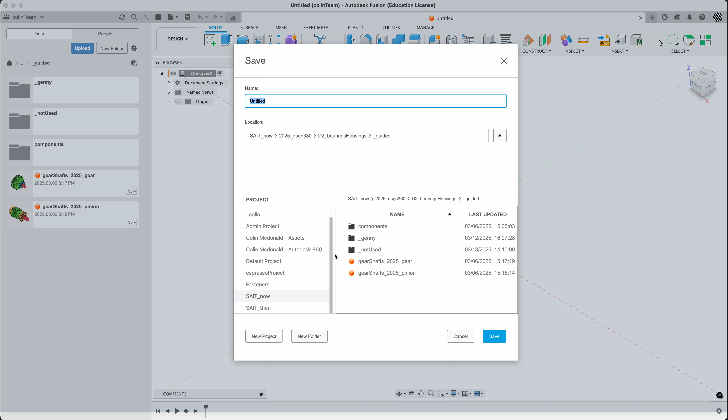Gonna pick up a name from somewhere else. So if I open up the location, I can see my tree, go into somewhere where I've got a name I would like to use. Let's do number 6. Nice. Go back to where I want to be and save.

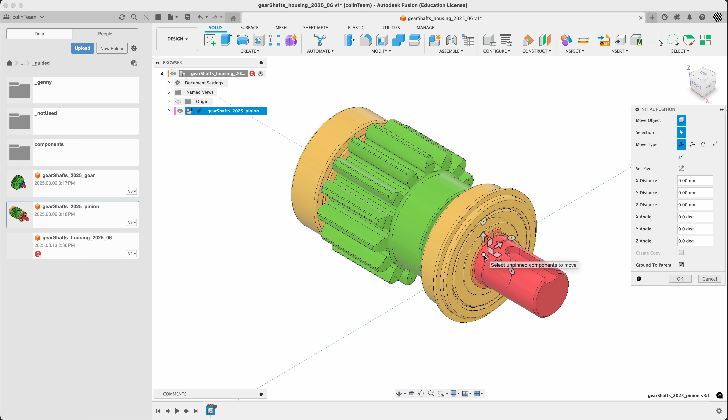Previously I've made some 2 gear shafts, pinion low gear and gear, big gear. Just insert these into the current design. And this is our first one that will just overlap the origin, so the origin of the component, the pinion, will sit at the origin of our part. Say okay, make sure it's grounded.

Sorry, I forgot to turn on the app here. Let me just start it up. The goal here is to build a housing around 2 shafts. So we'll put in our second here.

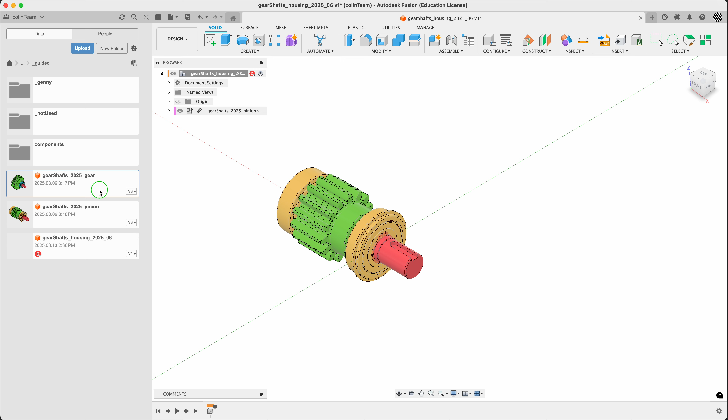I know that the distance, the pitch distance, or the rolling distance, or whatever you want to call it, is 90. So just pull on my, in our case here, up through the positive Y, type in 90, ground to parent, say okay. Everyone's good, except we can pull these.

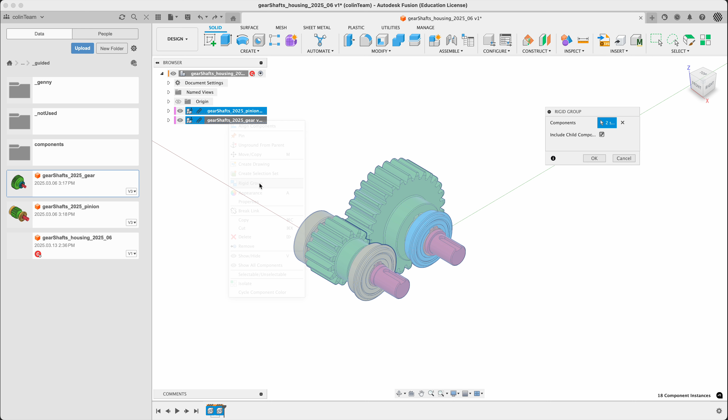So next and last step for these guys is to go ahead and rigid group them, include the child, and we can't pull it. This will save us from accidentally pulling something. Perfect, I'm going to save this just to make a point here. I'm going to call this shafts placed.

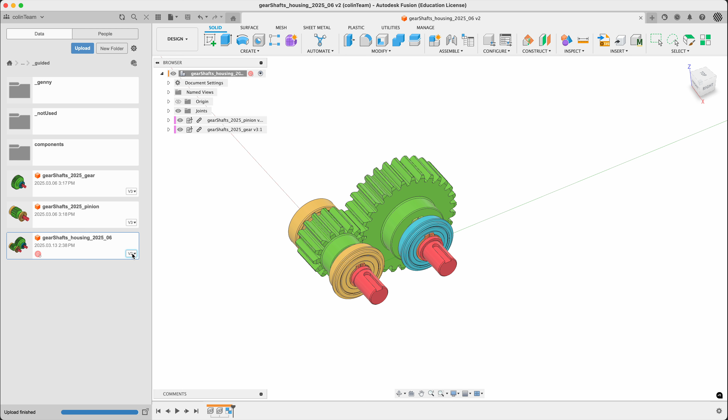This will trigger a version to be made and a good start point. See V2. Oh, there it is. There it is, shafts placed. We'll close this down for now, the data panel.

Now we want to make a housing around this. The housing has to hold the bearings, hold the shaft, holds the gears. So we've got an input shaft, usually an output shaft. This is not ultra realistic, they're very close, quite small. So we're going to deal with the tightness of this as well.

Don't get too focused on this being the only way to do this housing. There's lots of different ways. We're just going to be making a point here.

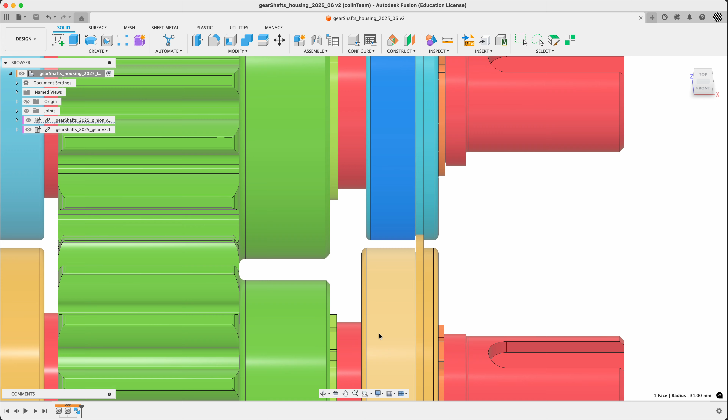If I line up on this top front corner, we can have a look at the bearings. They're the same size on the outside, 31.

However, we see the widths are slightly different. I've colored these components to my liking. I've made both of these bearings, which are from SKF, the same color based on width, and they have a different bore as well, so these are all modeled correctly by SKF. If we shift to wireframe, we can see the gears are from KHK, are all metric, so everything's looking okay.

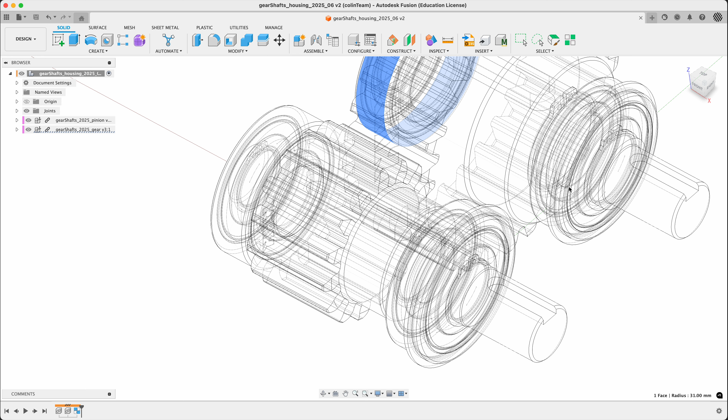The goal for you guys here is to put a housing around this that makes sense, a rational housing. Excuse me. Let's have a look at the right thing. Let's have a look at our guide here.

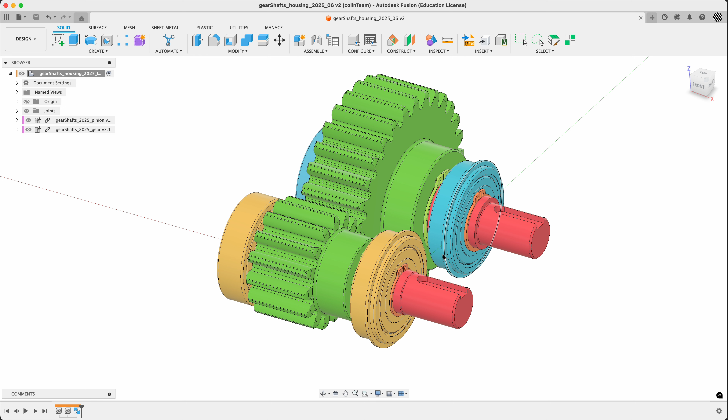My goal is going to be to keep the housing as bodies inside the larger component and only make the components right at the end. So that's the plan.

the housing based on the components, kind of similar to how we were doing shafts. Just going to move this here. So let's get started. First, we're going to need an inspection probably, section analysis, just so we can see through the parts.

See the balls modeled in the bearings. The shafts are solid. There's a key hidden up in the assembly further. So that's fine, turn that off and on.

Let's have at making a sketch. First thing I'm going to do is try and place something in a sketch so we can control the size of the housing. So let's begin with a sketch on, say, the XY plane.

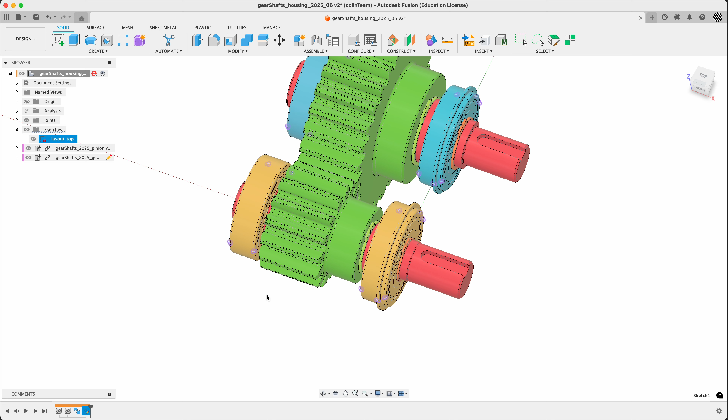Sorry, moving stuff in my office here. Okay, so... losing my voice. Getting sick, COVID. Okay, so let's see here.

I'm going to use these guides to build our extrusion. I'm going to create a new sketch.

So I'm going to be after my ZY, YZ. Say okay. Hold on here, am I on the right thing? Just redefining, just in case I got the wrong one, ZY. YZ.

And go ahead here and start getting stuff sorted out. I want to begin with the kind of general shape here. So, oh, that's not right. Start up the sketch.

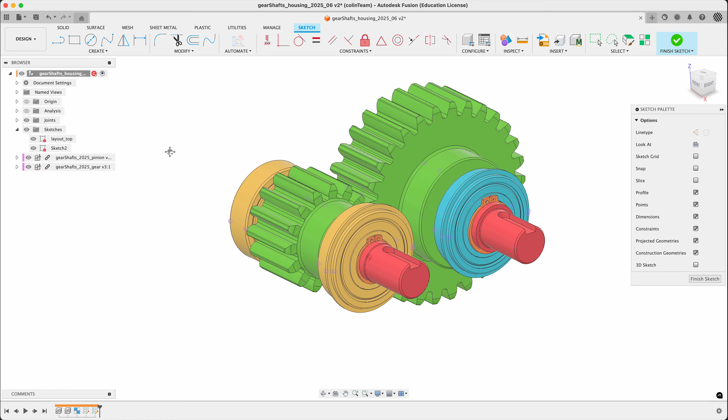So we want to attach the floor. My plan is generally a fairly boring shape, kind of like a rounded rectangle.

Notice I'm all over the place here. I'm going to do things on purpose, so horizontal, vertical, and tangencies.

The question is, where do we want to place things? Let's have a look here. We have the housing extending quite a bit above the gear and quite a bit below the larger gear, that is, not the pinion. So we're going to try and stick to that.

So let's just pull that into kind of a shape. And let's make sure everything's fairly kosher.

We're going to have a high cap, so maybe I want to see if we can grab that. Going to try and keep these fairly small.

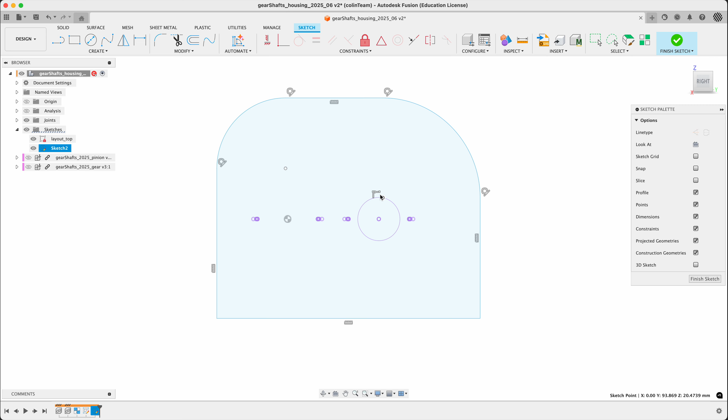It's fighting me. Hold on. Pull this up. Oh, that's why it's fighting. It's stuck, so I accidentally pulled it onto something.

Auto-projected there. If you want, you can just delete that. I'll have to watch out for that. So there's our shape.

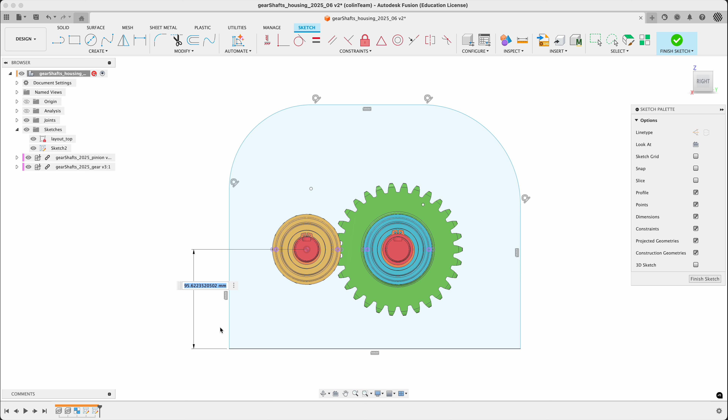Now let's start dimensioning. Where do we want the dimension from? The origin, probably. 95, let's go for 90.

Now, I do have to be a little careful here. I want this to be symmetrical. So I'm going to try and fit this in. I would like this line to be symmetrical.

Easy way to do that is to project something that gives me the other center mark. So let's try projecting something. Don't want to get the end because it's not going to give me a full circle. How about this piece of the shaft?

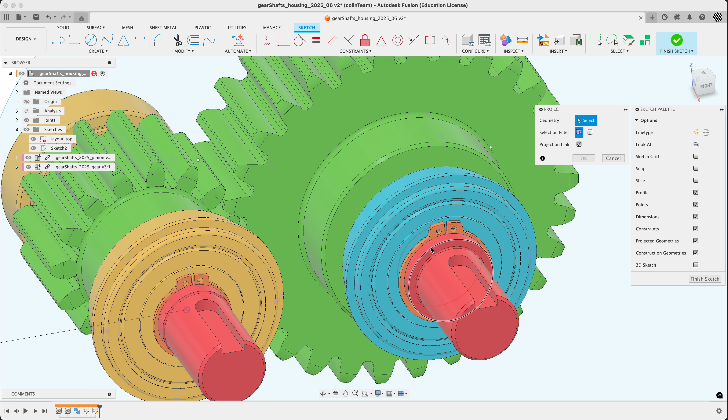Doesn't really matter which one I use. So let's go for this edge here. And it might not be such a bad idea to do the same for the other one. There we go. So that can stand in for our two parts. Gives us two origins.

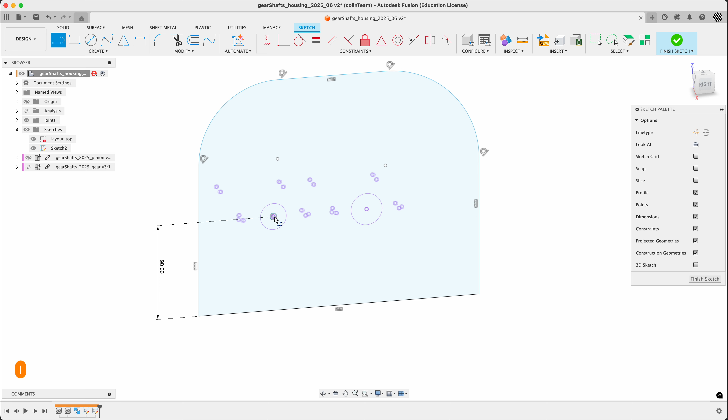Easy way to do that, well, there's various ways to do this. We can actually just draw a line to the middle from both. Make them equal. Maybe even make them construction so they don't get in the way.

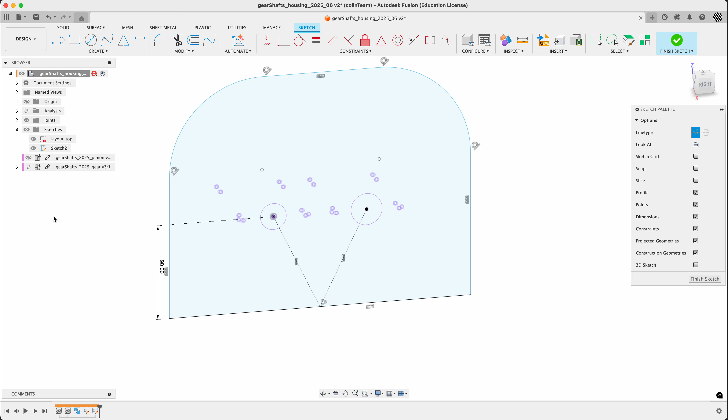And that gives us a nice way of controlling our spot. Let's have another look. Not too worried about the small one, it's the big one. So let's keep that one on.

Because we have symmetry on, we can dimension from the origin to whichever one we want. Let's go with 70. And then up, I've got 90 here. Would make sense to almost do the same.

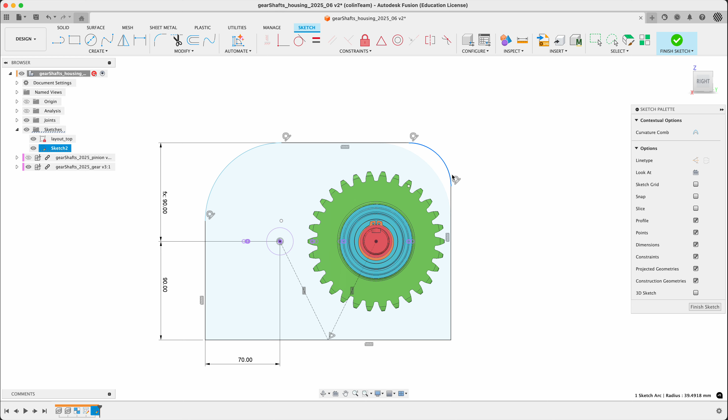And then all that's left is to figure out how big this fillet is. So let's keep the symmetry going. And because my dimensions are largely on the left, let's stick with that. Let's say 40 for now.

We're going to end up with a split. I'm going to map that in already. Let's just attach it directly across. Right now it's construction, that's fine.

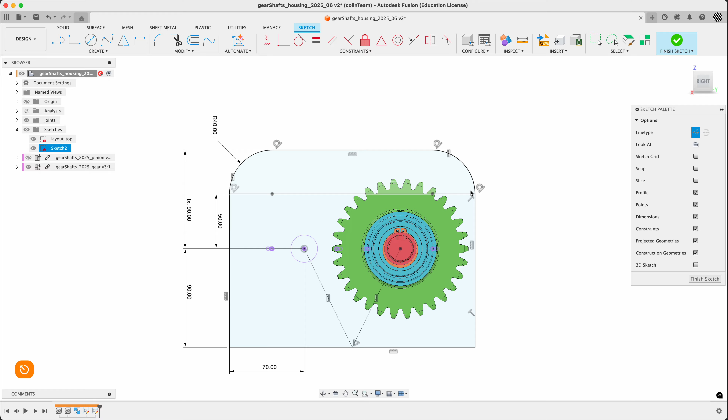Notice even though if I go beyond the fillet, that's fine, it does stay correct. So to me I don't see any problem with the top of the bearing, or the gear, sticking out a little bit. Let's get it about right. Say 50. Now we have a little bit of danger here because that edge is right on the start of the fillet. It may not be a big deal, but let's decrease it a little bit.

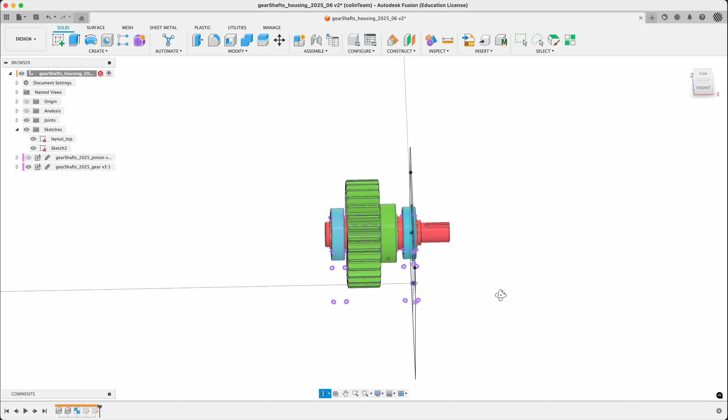So that's my plan for the shape of the housing. Where do we go from here? We're going to do an extrusion here, so this might be the inside of my housing, the void. Let's figure out where we're going to go from here.

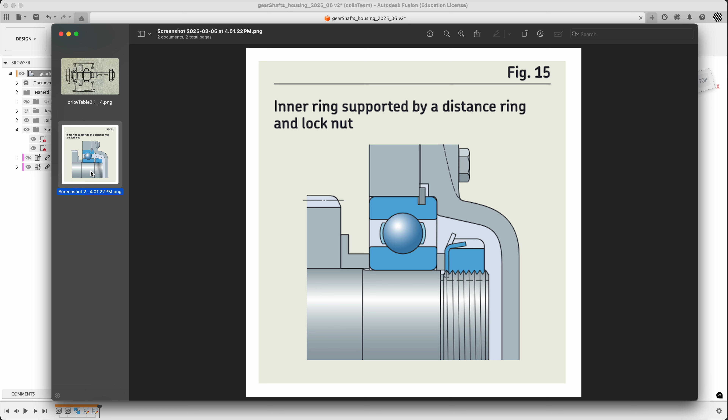So look at SKF, we have the housing lined up on the bearing inside face. Fine, let's do that.

Now let's do a prototype and then we'll come back and tidy it up a bit here. So extrude first - this thing's going to get in the way, so hold up before we do that. Can't do that yet, edit sketch.

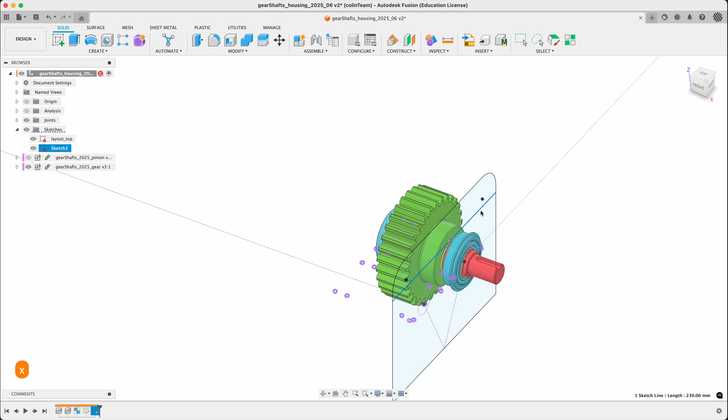Going to turn it back to construction, that part line. Just get the whole thing at once, easier. While we're at it, sorry, I was going to do this later.

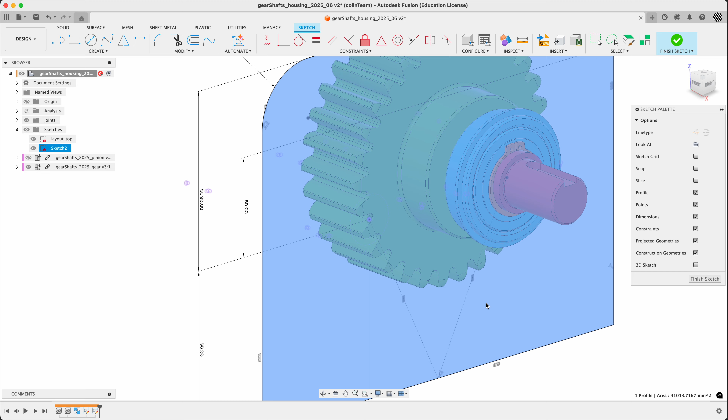Notice that we've got a hole here, so in the region let's edit that sketch again. This one is also construction. There we go. But we already know the size of the bearings are all the same, so let's project our actual bearing size on here as well while we're at it.

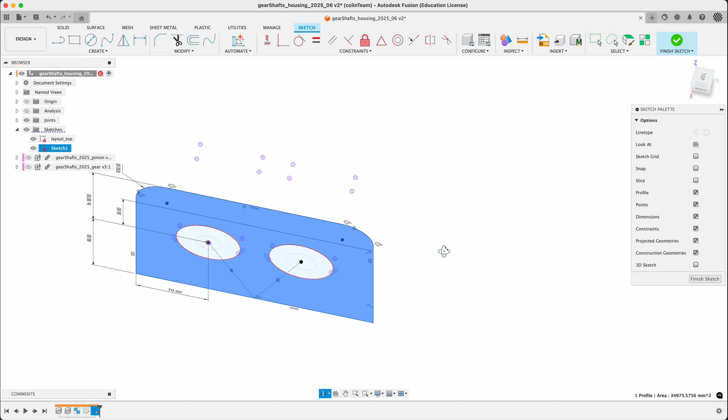Let's project again, I'm going to pick this whole face on both. What does that give us? Right, there's our bearing. So we have a region which we can extrude and we won't interfere with the bearings, which is good. So, extrude this way.

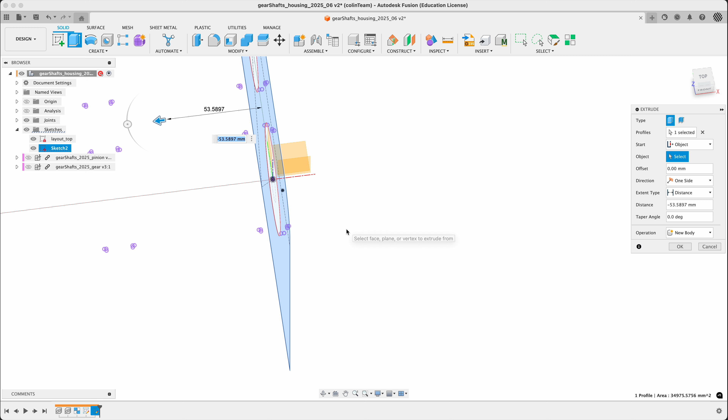Now we want to go from the bearings, so we're not going to start from the profile plane, we're going to start from an object. It's a little hard to see here. If I press Command or Control, you get it to turn off the preview.

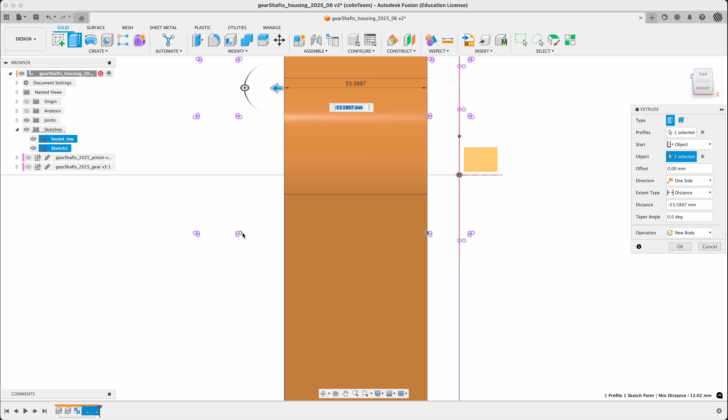So I want to start from the inside of the bearing. So I know where I am, let's go to home. I'm going to pick that guy first - that looks fine. And I'm going to go to the opposite side, which is over here. So not a distance, but to an object again. This should have the bearings sticking out completely.

Let's turn everything on again. It's kind of good. Now I'm going to make a wall thickness here, so let's go with 5 and then try a shell after I drink some more tea.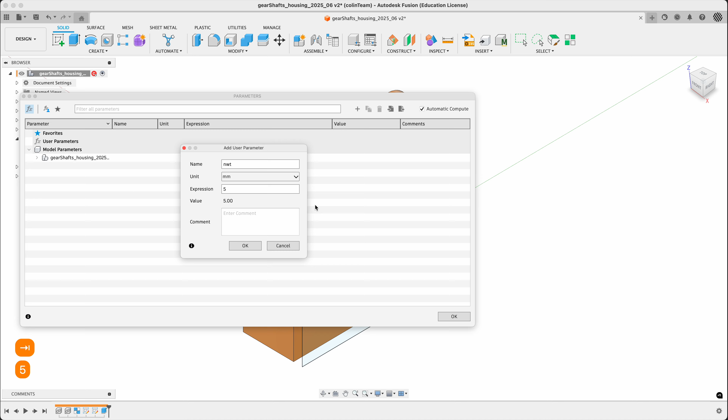So first shell - no, let's do the nominal wall thickness. Let's do a user param, nominal wall thickness standard, let's make it 5. Shell.

Shell, shell. Pick the whole body, it's easy to pick in the tree or in the browser. And let's go outside, NWT. It's acting correctly, you can see it eating a bit of the bearings - that's okay.

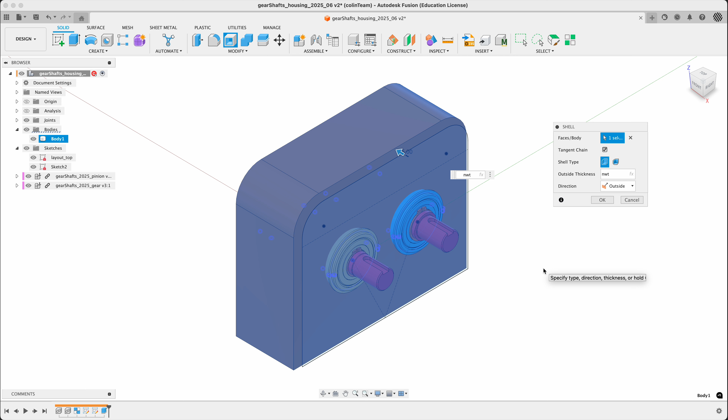Turn on our analysis. Now ideally the housing goes right through - we can see we have a small area here. Ideally the shell goes right through the ball in the bearing. We can see we're not far enough here.

So two things to move - we have to fix the extrusion a little bit and fix this extra piece. So let's actually do it in reverse, fix the shell first. It's asking for bodies, but what it does is if you just pick the body, it just hollows it.

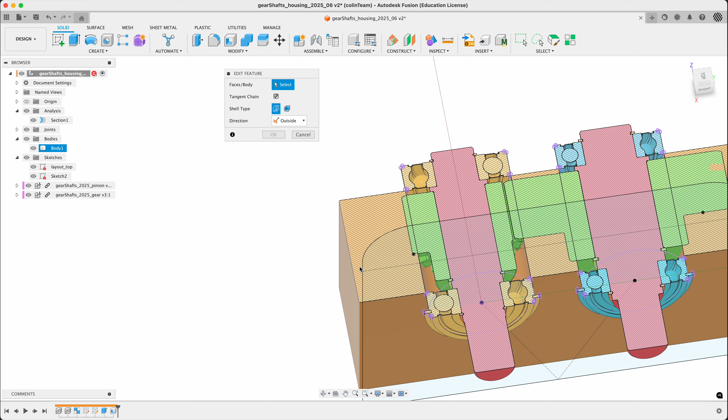Another way to do the shell is to actually pick the faces you want to remove, that's these guys. Just pressing Command to remove the preview. That looks good.

Let's check how we're doing, two steps at a time. It's better. Next, we're too far inboard, I would argue, so we should try and put the housing through the balls, or a little bit more. Let's move out one more nominal wall thickness here.

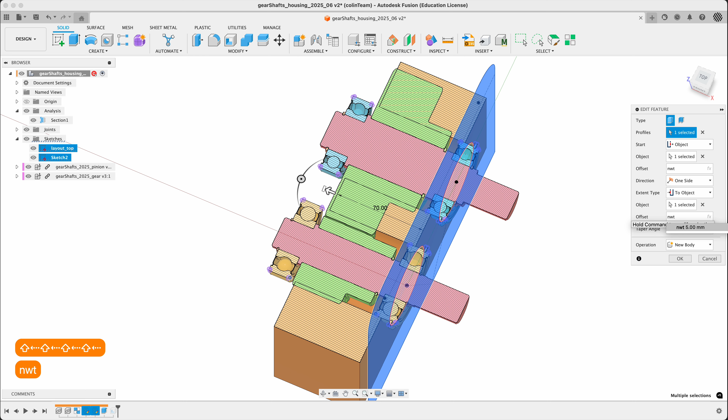So back into extrude. Notice when we've got offsets, when we have objects, we have offsets. Let's try NWT and see which way it goes. Oh perfect. Let's try the same on the other side. No, that's the wrong way, so negative. There we go, try saying okay. Look at that, nice - so our housing is looking good there.

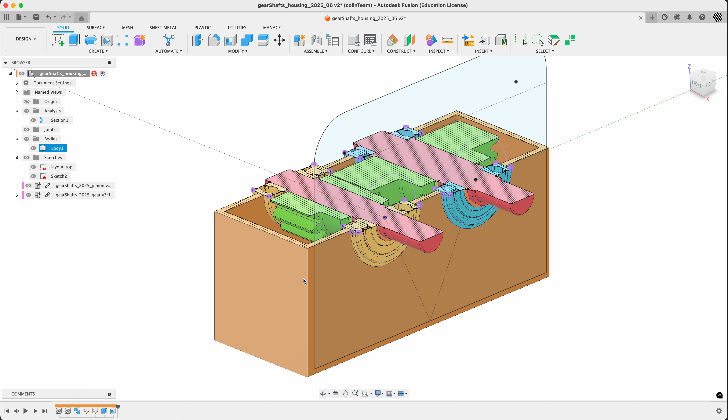Or at least the walls are, and we've got a good gap over here. I would like to tidy this up a bit though. Right, these corners are going to be hard when we cast this - the contraction or the freezing of the material is going to put a lot of residual stresses into that corner. Maybe we can fix this up.

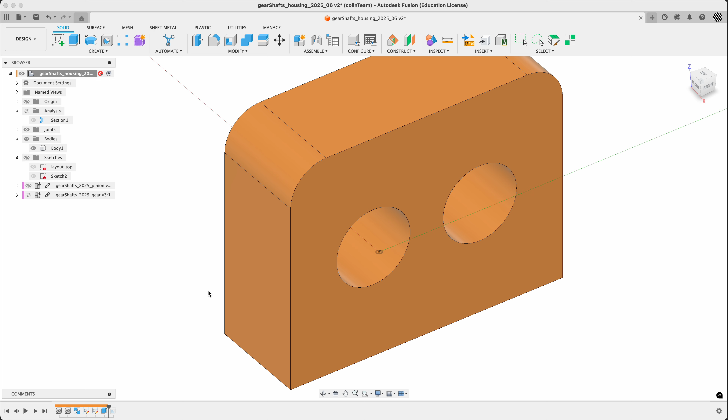The easy way is actually to do it before the shell. So let's hide our stuff and turn off our analysis and tidy this up a bit. It might be easy to actually just use a chamfer - right click on an edge that will take a chamfer, make sure tangent chain's turned on, and maybe try 10, 15.

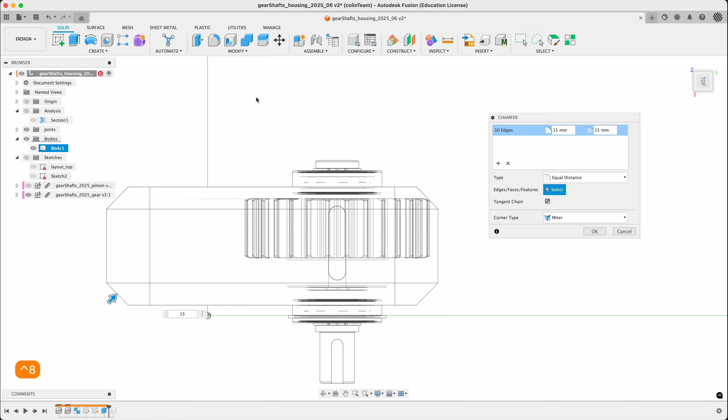Checking. This is the inside, that's a bit close. Looks good. Better known as NWT times 3. How about 2.5? Getting a little close, it's not bad, but to be safe, let's go with 2.

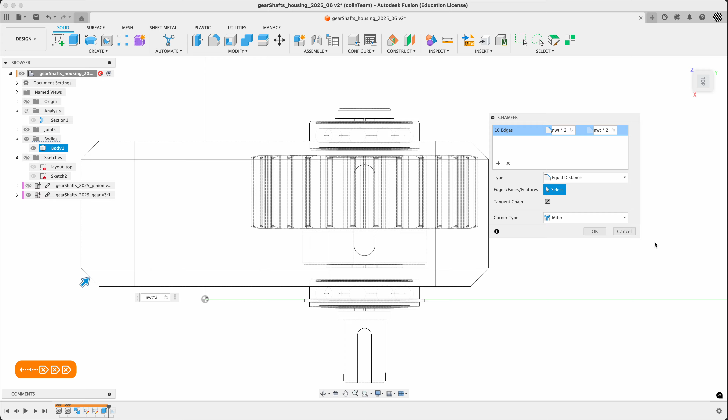Back to normal view, and we can see our shells yet to happen, so shell. See both parts and have a look at the analysis. No problems over here. This looks fine. Let's just do a little check here. Anything we can grab out here to there, about 4 millimeters, that's fine for us in this size.

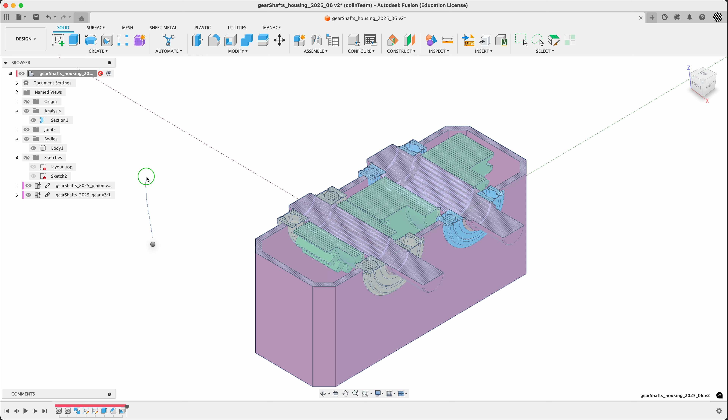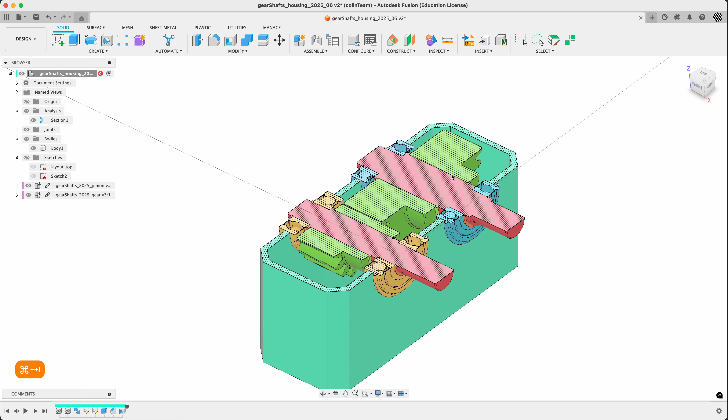So that's our part. Next, let's look at our sample. We need some material to hold the bearing, obviously, and right up to the ring on this guy. So let's keep an eye on our ring. Also a little chamfer here. Okay, so that means our chamfer is going to be on this side, on this orientation. So

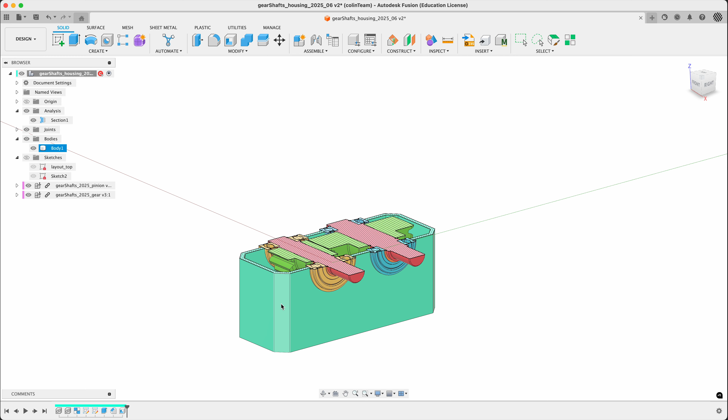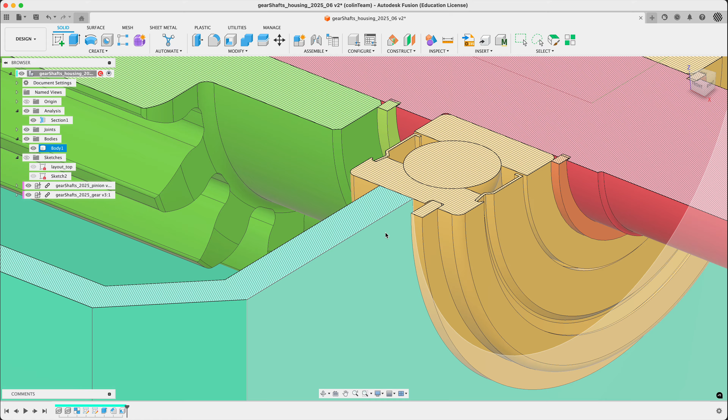let's add something. Now, for the purists out there, and I know that's okay, we're just doing an intro here. What type of shape should this be? Most of the time you just put a ring around here. So we're going to be filling this spot up to the inside of this, and then from here down to about there. So the temptation is to kind of do loops and follow the shape of the shaft. I'm going to do something else. If you feel this is violently opposed to your philosophy of life, sorry, too bad.

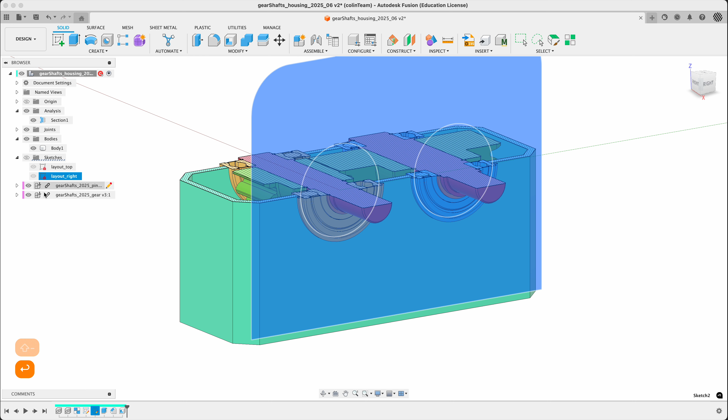So we're gonna have a sketch here. This is our layout. Right. Underscore. Then we're gonna edit that guy. So I'm gonna hide these two because they get in the way. Just layout right. We already have quite a lot of information here, so let's just continue. We've got enough here probably to get going without that one.

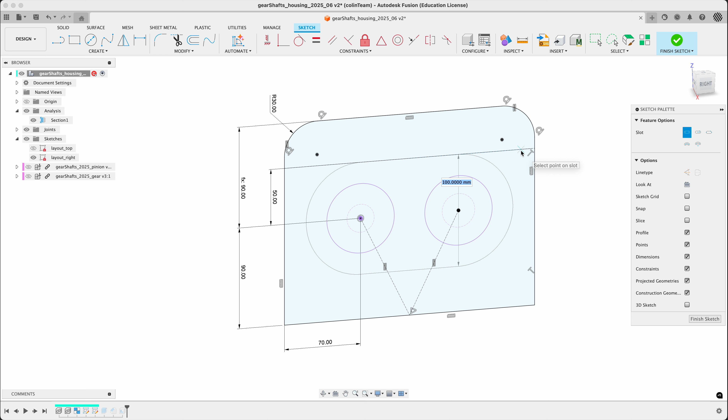So I'm going to do a slot shape. So S slot. Center to center because we have two centers. Don't go above the cut. So 100 is going to be our max. Let's see. Turn on something to give us some ideas.

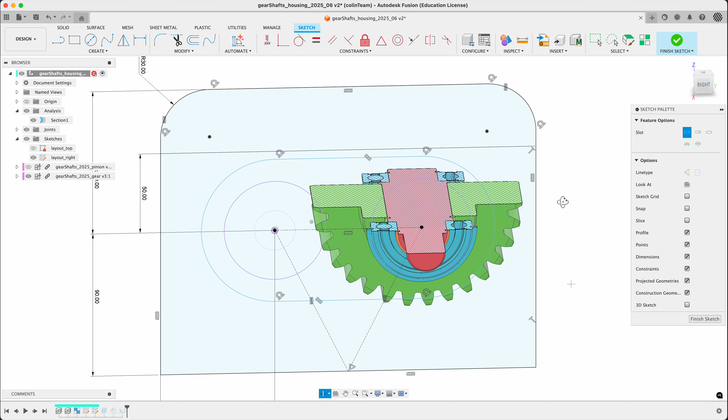So we just need some material here to take some fasteners eventually. We're not going to model it in this effort because I've done it before. It takes too long. So let's just use a dimension here. Let's say 12. This gives us some room here. So maybe we need to move this guy up a couple of millimeters. Still got some room on the top. So maybe that's a good plan.

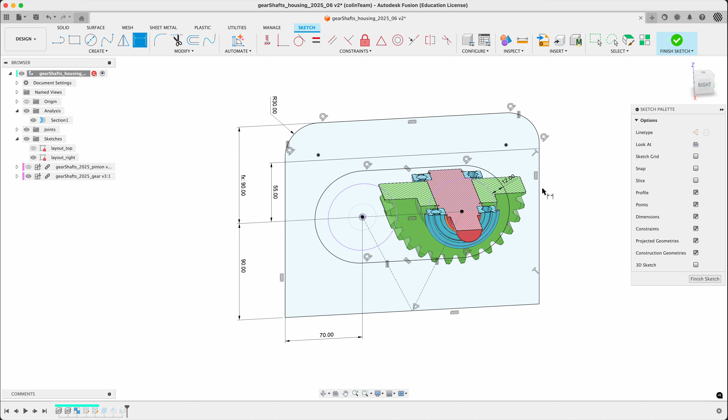One of the dilemmas is when you're doing castings, you want to pull the core out of the inside of the thing. So you want the inside core to be pull-outable, if that makes sense. So it's not bad form to allow some way of making sure that we can get this out. We're not going to do drafts either because otherwise this video gets crazy long. So let's just do a little prototype. Let's see if we can use this on both sides. So let's have a go.

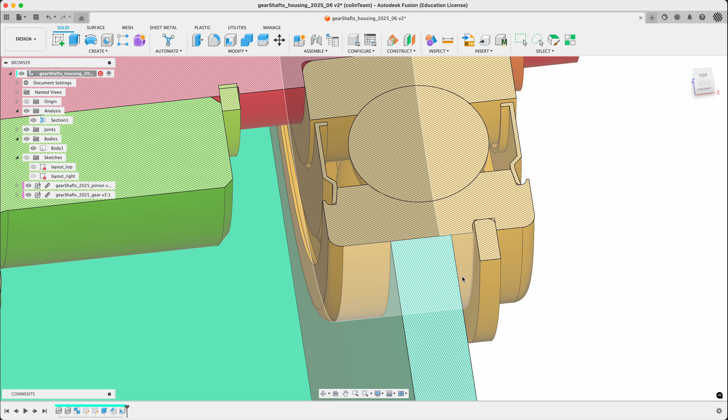Now, before we get started, one of the things that we have to be a little careful of, just hide all these sketches for a moment. I have modeled these so that the two rings on the shafts are lined up and they're on their origin here. You can see that. The problem is, sorry, wrong ring. Problem is that this is not a rational distance because of the way that it's modeled, and it's just in a slot. If we measure this,

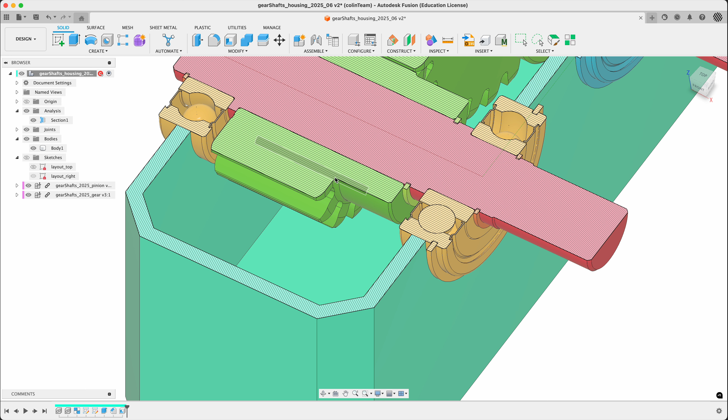2.02, that's perfectly fine for the bearing. That's how it comes. But for us, we'd like a rational number. 2 millimeters is quite good. If the shaft gets mounted and assembled 0.02 millimeters further in on both sides, that won't have any real effect on the parts or the functionality of this thing. So we're going to do a rational approach here. Rather than just going straight from the ring, we'll actually come away from the wall of the

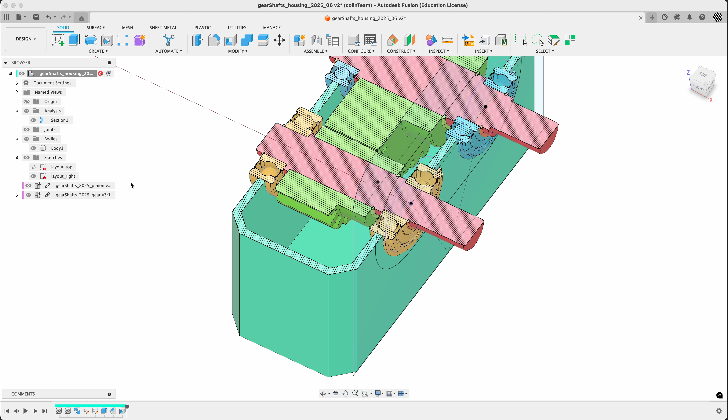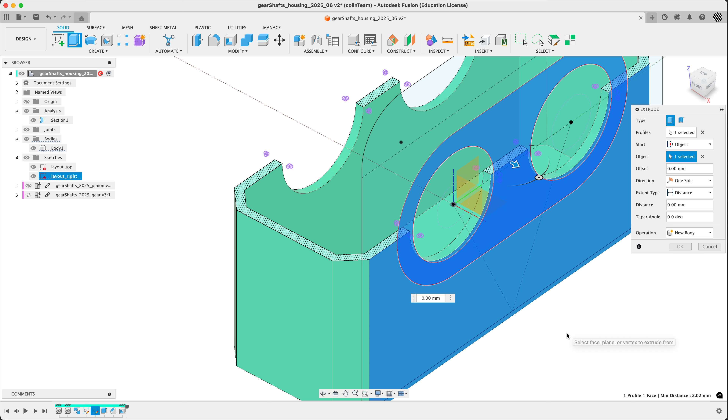housing. So let's turn our sketches on. Sorry, and continue on. There's our shape. Now we can get rid of all this stuff and just turn on our other sketch. If we hover, we can get a little quick ghost of what's going on. So first, extrude that guy. I want to go from an object, the plane of the housing, and go up. Well, it was 2.02, so why not just go 2?

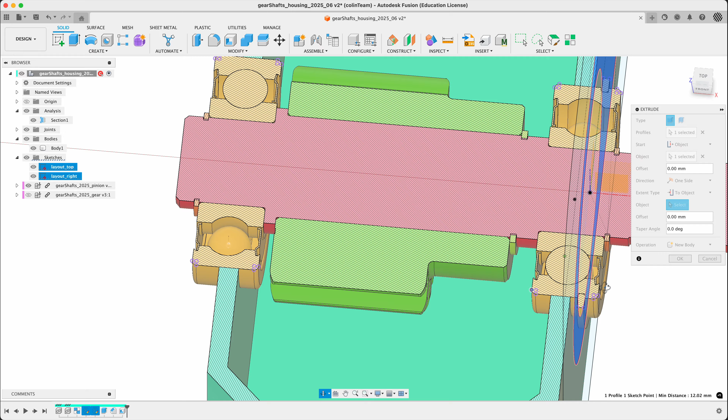But we're missing the inside. So let's rethink this. Keep it 2 for a moment. So let's instead say this is our object. And we want to go to another object. This time the wall itself again. It thinks you want to cut, no, join. And then we want to offset by 2. This should give us a small tiny gap here, which will be taken up in the assembly itself naturally.

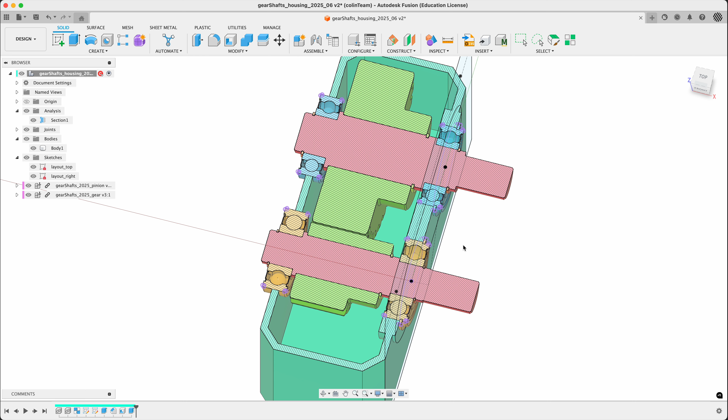And we get it all, that's not bad. So that's good, let's go with that. So it's looking okay, let's check the other. It's a little bit short, but that's okay, because this is mounted on first, and then the rest of the shaft assembly is pushed in through here, so that's fine. No problem there. Now, maybe we can just do the same on the other side.

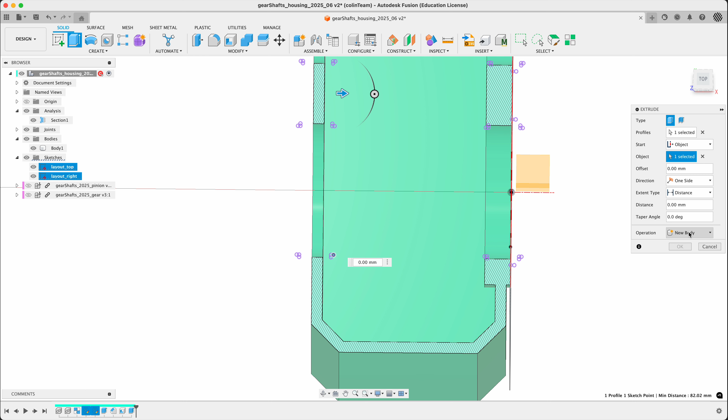Let's do another extrude. Use that sketch. This time we're going to go from one object just straight through to the next. So I'm going to use the closest ones again. So not from the profile plane, but from an object. Do another object. Not a cut, but a join. See how those go. It's good there, because that's what we picked. And it's good there, because it's not bad. It's fine.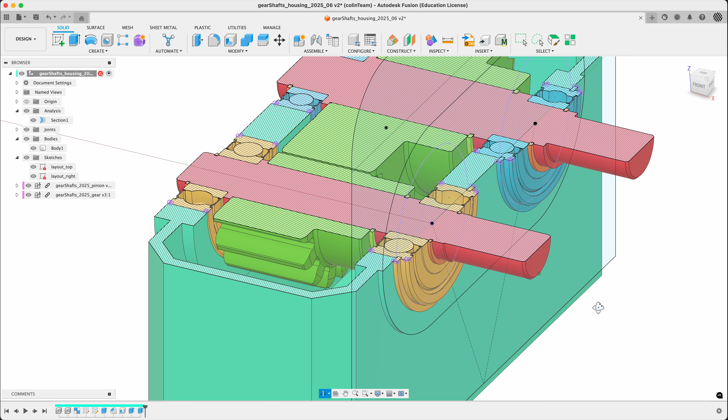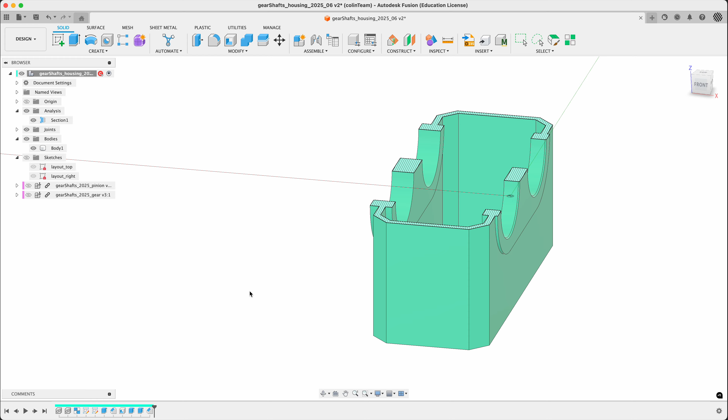And we needed that chamfer. Let's do that while we're thinking about it. So we had a chamfer here. Right click on it, put a chamfer in, one, say, just turn off the preview. Pick the other one. We're gonna end up with an accumulation of smaller secondary tertiaries out here, that's okay. The other one in our guide doesn't have any chamfers.

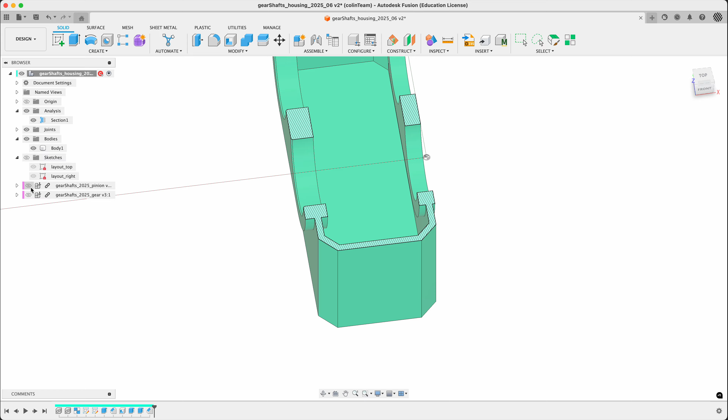Oh, idiot, wrong one. Hold on, let's fix that. If you're doing this, maybe pick the other ones first. I'm on the wrong side. And then unselect these guys. Then you don't lose your row. Sorry about that. On the correct side. There we go. Because this is the assembling direction. It comes in from this side. Looks okay.

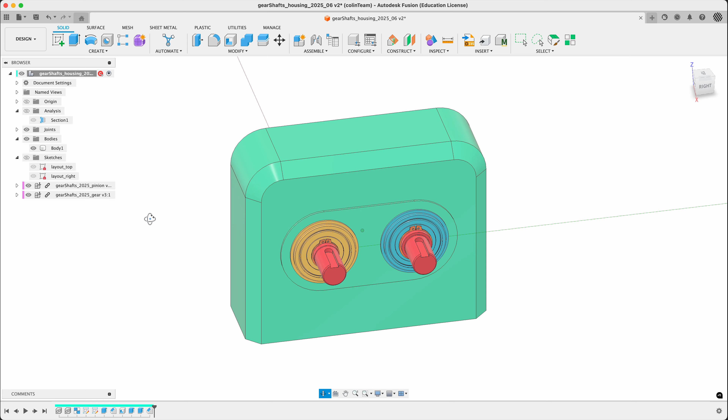So I'll turn off our analysis to see what's going on. Let's do a practice split. So sketch is back on. Split. Let's see if we can split it with that construction line. No. So we do need to go in here. Edit sketch. Construction X to toggle off. See if we can split this time. Split body. This guy. Tool is outline. It extends, cuts it off.

Notice we have our curve starting above the split. That's good. Safer. And our gear sticking out a little bit. That's okay. Looks very exciting. How about that? And there we go. That's our beginning. Oh, no, before we continue. We do have a problem with pulling this out. There is an undercut here. Let's do another inspection on the other side.

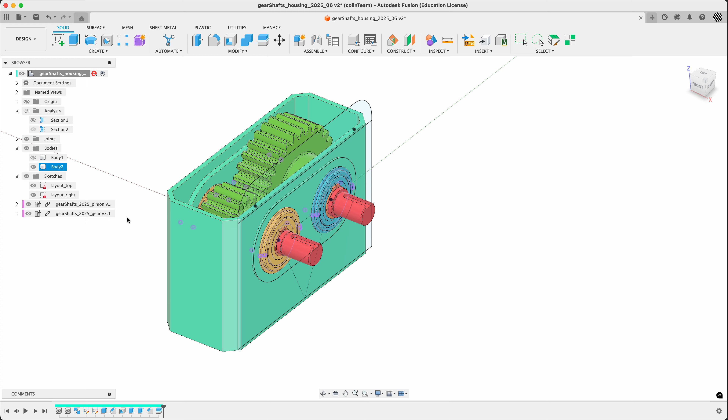Just switch. The underside of this is not pull-outable, right? The core will get stuck on that. There's other problems here. The fillets will not go on and all that sort of stuff. We'll fix that maybe later. But for now, we can't deal with this. So let's modify our sketch one more time and add something that we can use to deal with this.

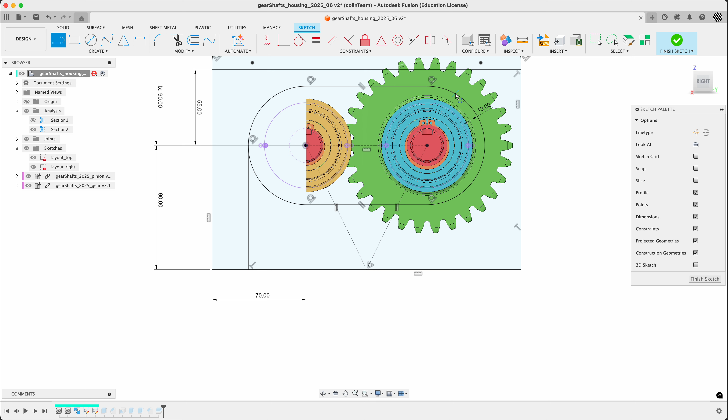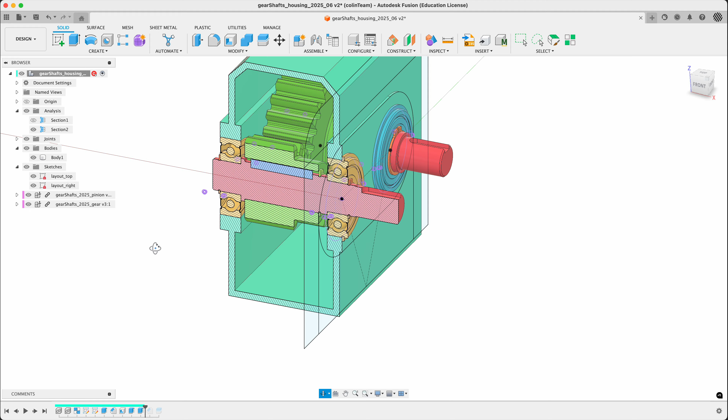The easiest way to get a tangent line is click somewhere on the line, drag, you'll see it pull around, snap to vertical, snap to the bottom line, same on the other side. This gives us a new region. Doesn't screw up anything we've done already, but now we can do another couple of extrudes, and I'm going to do that before other stuff happens. So just keep the body showing. Sometimes it turns off, and then we can use the analysis if we want to just turn it on. Don't care about the shafts.

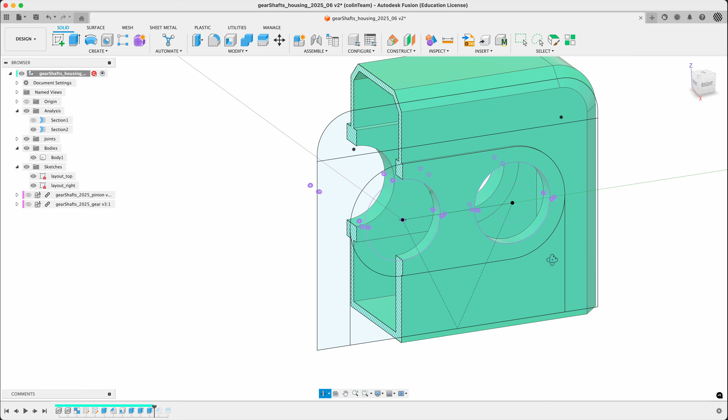So extrude just this piece this time, not from a profile plane but from an object, this guy, and to another object, the inside wall. Join. This is good for us because if it does move, then it just moves with it. So object to object is always a nice way to do this. Again, extrude from an object, say this, to another object, the inside edge. We end up with a locally thicker wall. It might cause problems, but it's hopefully outweighed by having no undercut. We run all the way to the end of our part.

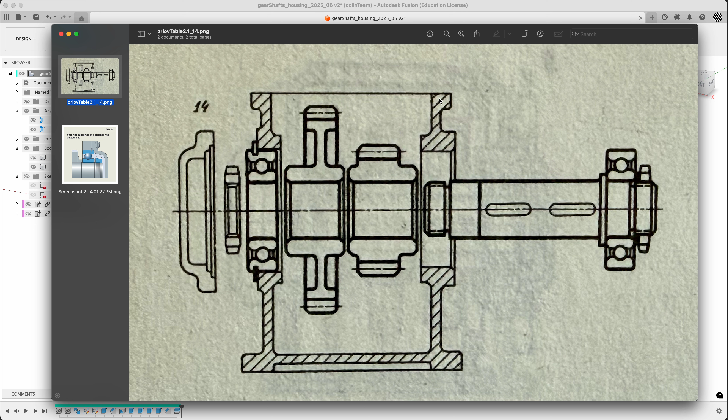There we go. We can see our top housing is looking good, so we can turn the top body on and off. Now, you might have noticed we're missing this, so we might be doing a little bit of fiddling here. So we've got lots of flange on the top, and we're going to put a foot on the bottom. But for now, I would say we're going to stop there. That's our end point of the video for now. And we'll just turn off our analysis. So that's where we're at.

Next, a little bit of detailing. Make some caps for holding stuff in the top. Put some rims around as per our sample. And then maybe a last video of making holes and fasteners and all that sort of stuff.